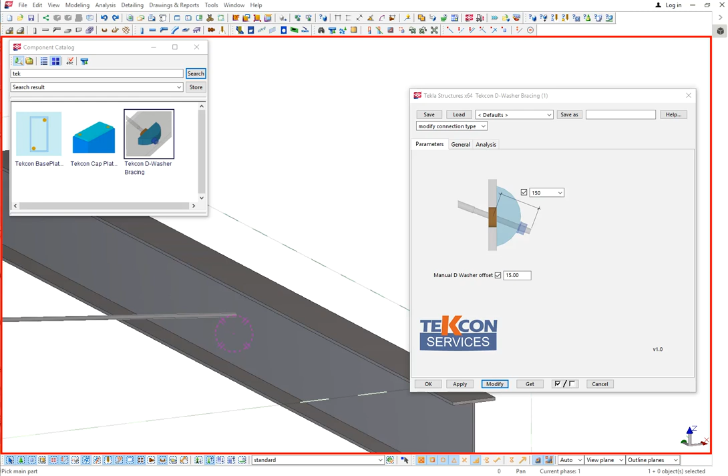This custom component is a D-Washer Windbrace connection and will add a D-Washer, a regular washer, and a nut. To add the component, you pick the main member and the brace.

If we zoom in, you can see a slot has been added. If I spin it around the other side, a D-Washer, a washer and a nut has been added.

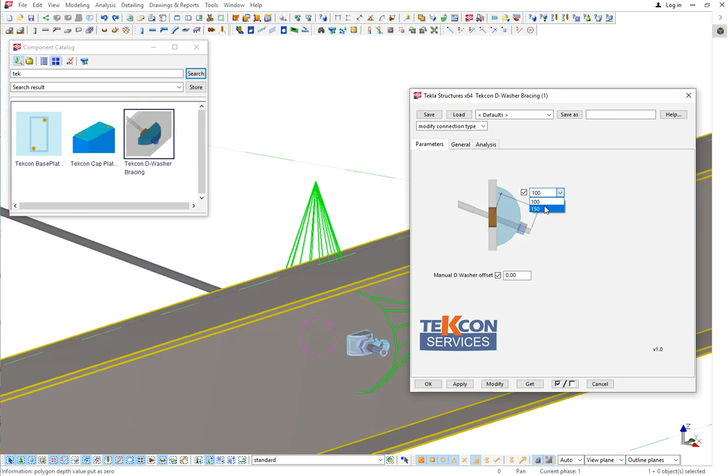The options in the component are really just an option to control the projection of the rod through the main member. 100 is the default. If I change it to 150, you can see how the brace will project through further.

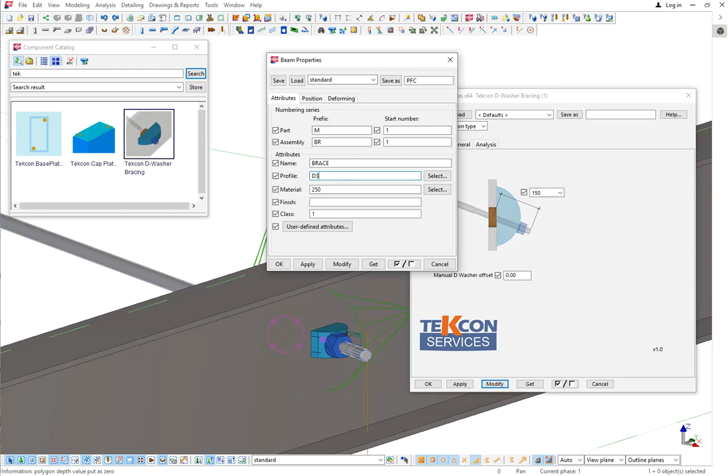The component will cater for diameter 16, 20, 24 and 30 diameter braces. So if I change that from diameter 16, it is currently up to a 20, 24, and 30. You can see how the D-Washer, the nuts and the washers were adjusting, and the same if I spin it back around the other side.

I change that down to a 24, and 20, and 16. You can see how the slot diameter was adjusting to suit.

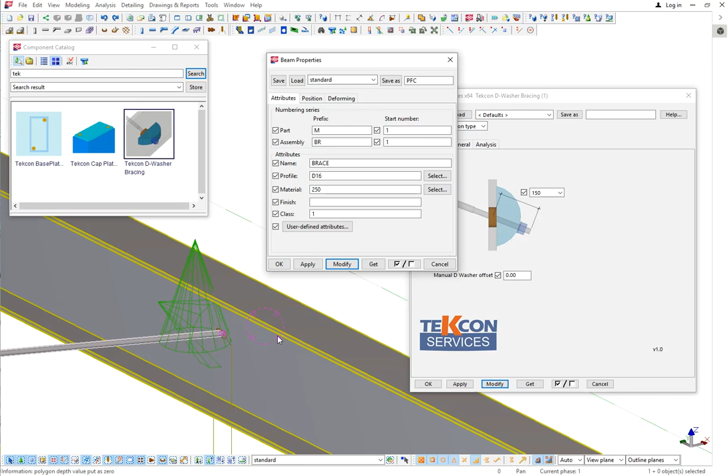The only other option in the component is for an option to manually offset the D-Washer. When you have a profile of main member such as a channel that's an asymmetric profile, the D-Washer is placed slightly in the wrong spot.

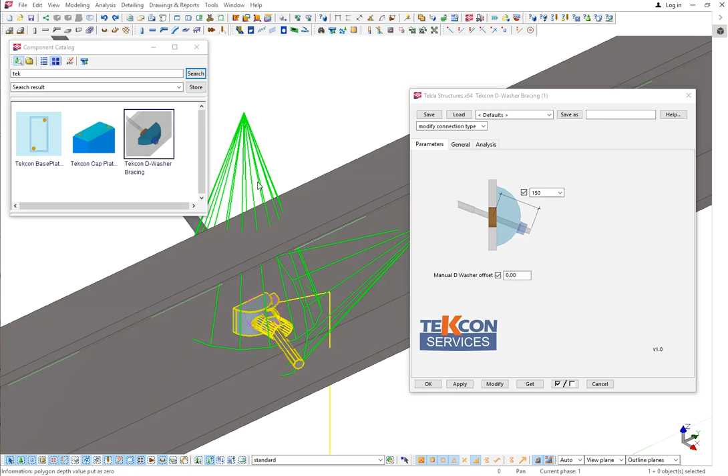It's just a calculation that Tekla does that can't handle an asymmetric profile that well. So I've added a field in there to manually offset the D-Washer, and that will then position it in the correct location. You don't need to move it, but if you prefer the model to look correct, then we have this option here to control the direction.

You can also move it the other side if for some reason it needs to go the other way. So there's control there depending on which way you need to move that D-Washer.

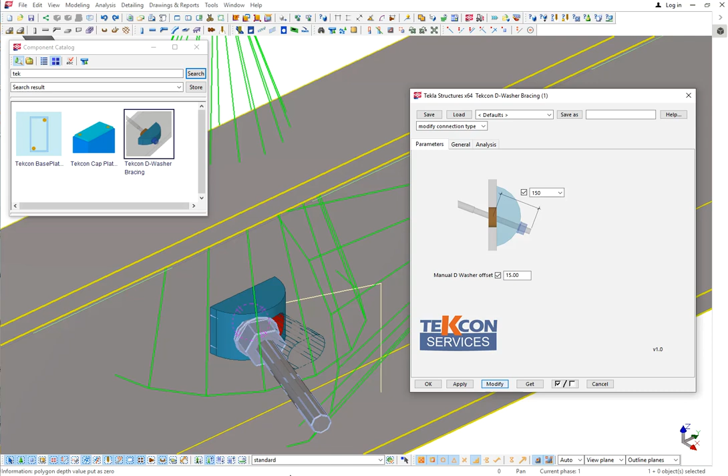All the objects in the component will be given a unique name and a unique class. So if we look at the D-Washer, we're using class 53 for the D-Washer. For the washer itself, we're using class 56.

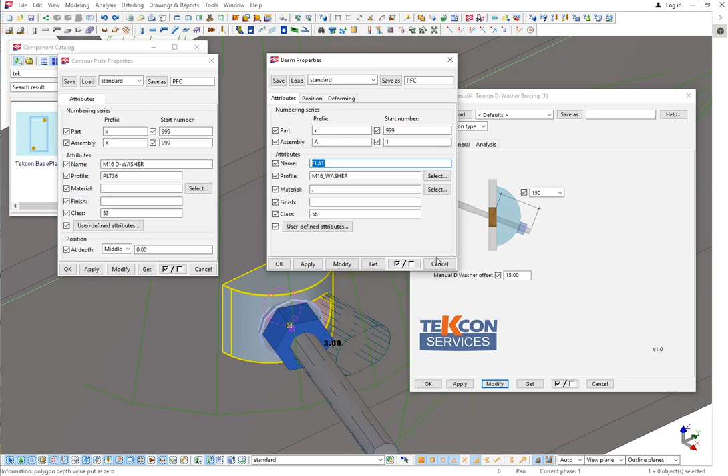We've given it a name of flat and a profile of M16 washer, and that will be adjusted to suit the size of the brace. And if we look at the nut, it's also got a class 56 and its name is 4.6 hex, being the name of the grade of the bolt.

Because we've used unique names and classes for these objects in the component, we can also add them to the bolt summary reports if needed.

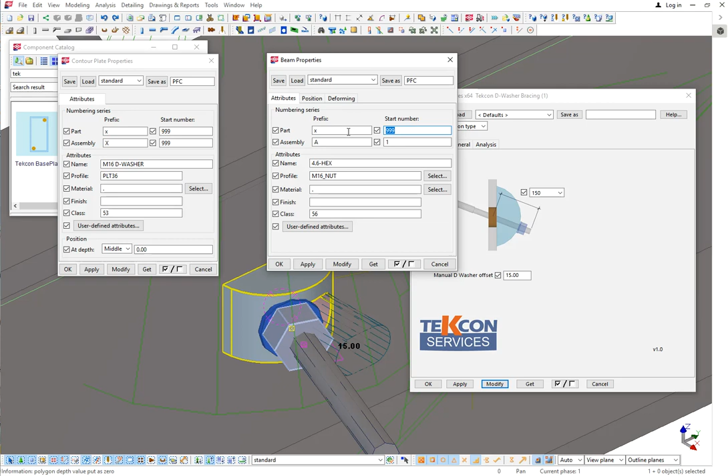Also note that the part prefix and start numbers have been given a very unusual number, so you shouldn't get mixed up with these parts in your normal structural steel objects.

Finally, just wanted to point out something with this component in that it has hidden away. If I just hide away the D-Washer, there are some very thin plates in the component. They are part of the wind bracing subcomponent.

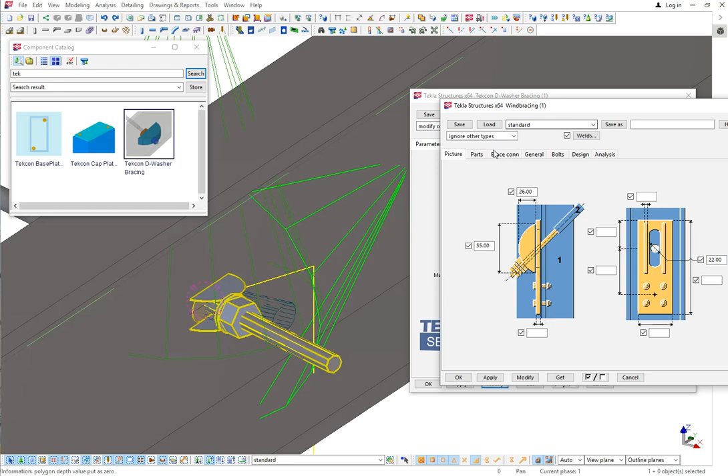It's a standard Tekla component, wind bracing 1, and they're parts that we can't get rid of out of the component. So I've made them just 0.1 mil thick.

I've given them the name of exclude, so that if you do need to take them out of reports or whatever you need to do, they can be easily identified, and also given a unique position number, start number and prefix.

So pretty much just ignore those plates in the component.